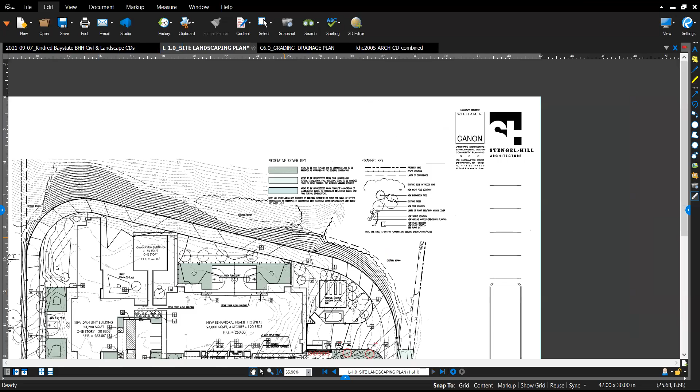So this is the document I sent to Jeff. Our main entrance is down here on the bottom right of the screen. There's an arrow here pointing right at that generator. The generator and the enclosure is right here on the site, on the right side of the building.

And then we actually have a standalone screen wall here that's 12 feet tall. And then we have a whole row of trees here. And like I said before, these are...

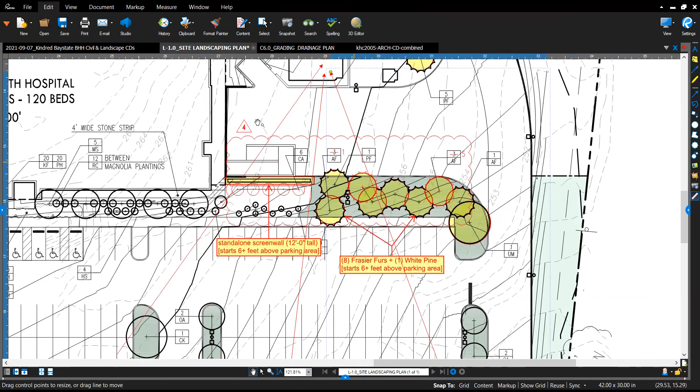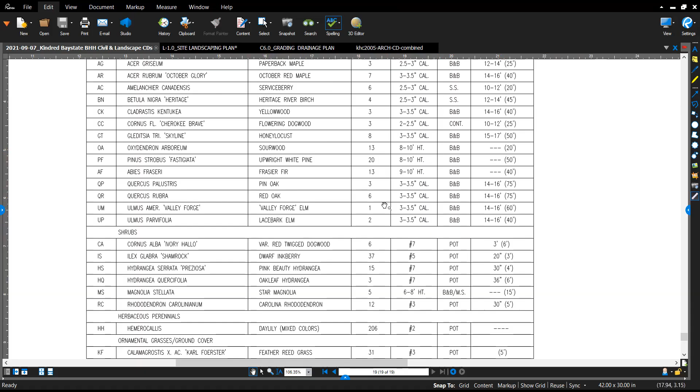Let me pull up the schedule. So those are Fraser firs and white pines, all of which grow to a significant height. So I don't think there'd be an issue with screening there, but I wanted to illustrate that in my opinion, those will do a great job if there was any concern about the appearance from the street and public view. Those trees and that screen wall would do the job.

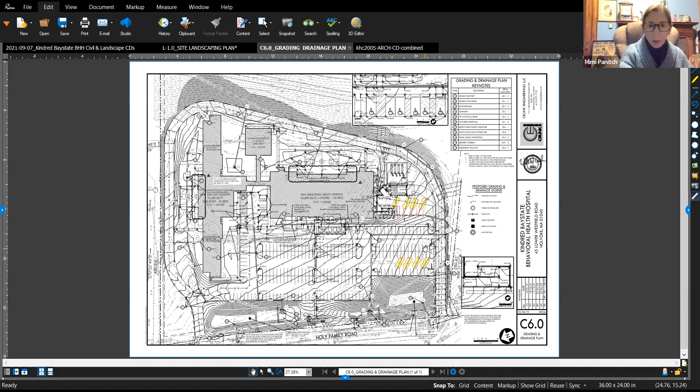If you look at— I'm sorry, go ahead. No, I was just going to ask about the size of the trees at planting, and how soon they're going to reach a height where they really will do all of that screening. Because I think this is just a question of how long it is before they take care of any visual issue whatsoever. Yeah, so I can tell you, based on our landscape plans, they're going to be purchased at a height of 10 feet.

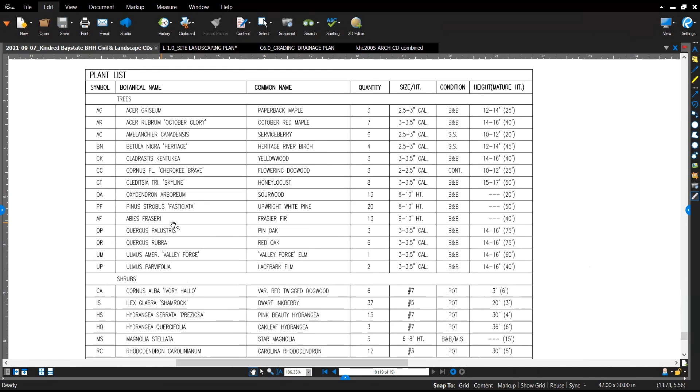Looks like the white pine is 8 to 10 feet and the fir is 9 to 10. They both grow to significant heights of 40 and 50 feet. Also, one other important item to note is that the parking area is about 6 feet below where those trees are planted to begin with. So we're already 6 feet below. Your perspective from any of these areas is significantly lower at the entrance. So just keep in mind you're going to be about 6 feet below anywhere you're looking from the parking area.

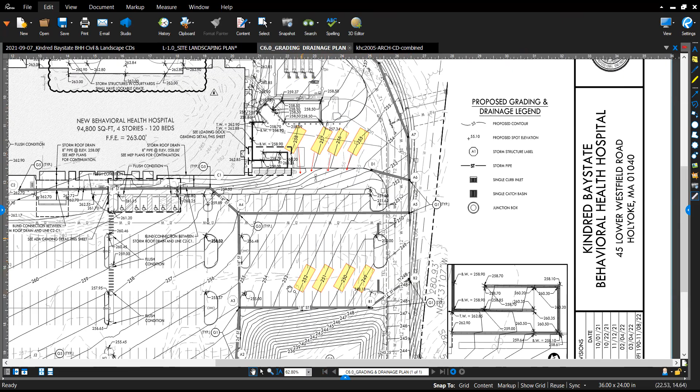My impression is that these are relatively fast growing trees, but I just don't know for sure. Yeah, that's a good question. Off the top of my head, as the architect, I don't know—I'd have to check with our landscape architect. It says at maturity, obviously, but I don't know how quickly that happens. But they don't need to get to 40 and 50 feet to provide full screening. Exactly, yeah.

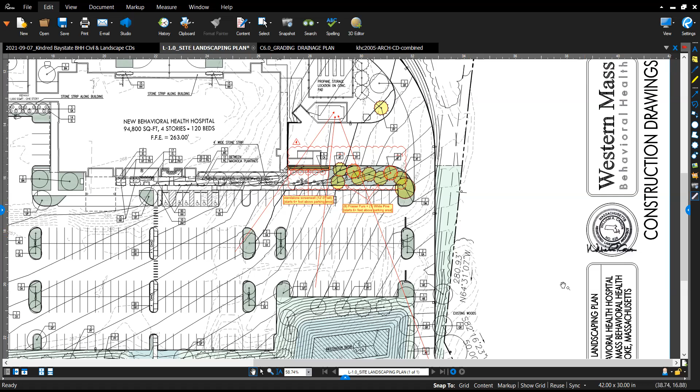Well, any comments or questions from the planning board? Yeah, Kate has her hand up. Okay, Kate?

Just to confirm, am I correct in remembering that the fence is for a visual barrier, not for a noise barrier? We're not worrying about the noise. Right, it's primarily there for aesthetics. Okay, it does— obviously it will provide somewhat of a noise mitigation as well. Okay, so I guess my question is, does the height of the fence matter in that regard? If it doesn't, I think the 12-foot height is probably visually more appealing than a taller wall anyway.

But then about the trees, because I know other people who've come before us have also had trouble sourcing their trees given everything that's going on. I would just want to make sure—I think personally, if they're going in at a 9 or 10-foot height, that's probably reasonable, but I wouldn't want to see you come back at planting time and say, well, we couldn't get the 10-foot trees, so it's a 6-foot tree. If you can't get the 10-foot tree, I'd like to see it taller rather than shorter.

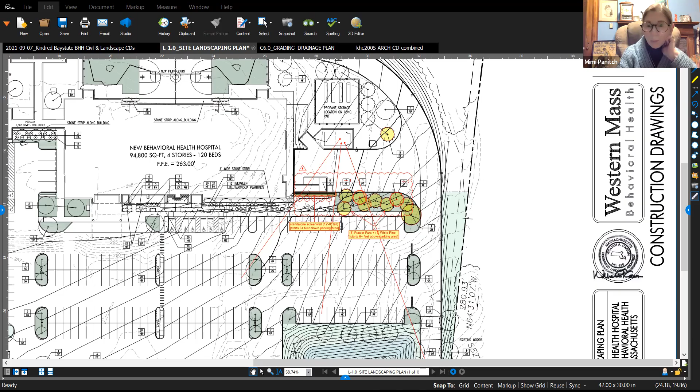Okay, anyone else? And just to make absolutely sure that Kate's question got answered, this 15-foot generator is not going to create more noise than the 10-foot one would have, and doesn't require additional buffering. Is that correct? You're correct, yes, that's my understanding. Okay, anyone else have questions they'd like to ask at this point?

If not, I think we are down to questions of how we want to proceed with this. It seems like a very reasonable proposal, and I can't imagine us wanting to hold you up over the fact that you couldn't get a 10-foot generator. Appreciate that. So, site plan amendment?

Jeff, is this something that you think we can just sign off on? Well, on some level, I think we should at least receive an amendment form, just so it can document that we had something on file, just so that way to put something in the file to show that this was thereby approved by the board. Yeah, no, I think that's right.

We certainly don't need to reopen a public hearing over this. Right. And if they could just give us the form retroactively, so the board could approve the changes tonight, and then pending that he provides that form, there isn't necessarily a formal response letter, or I guess an informal response, of the decision. But I don't think you record that.